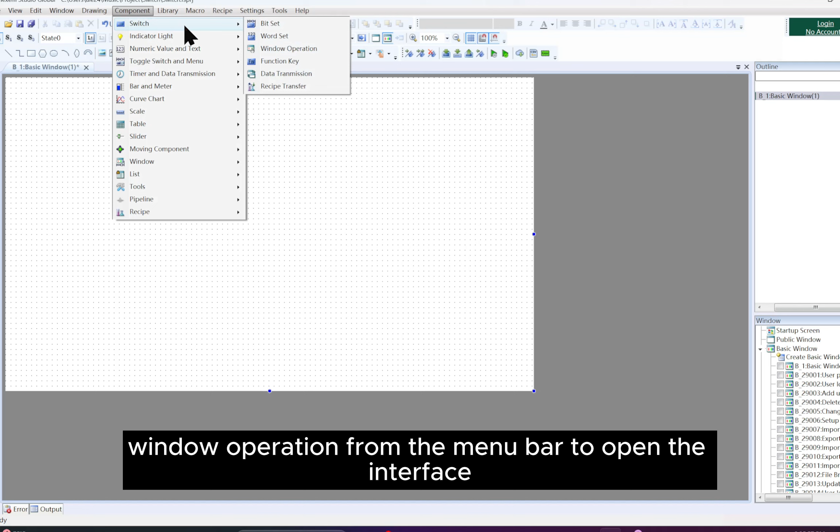Navigate to Component, Switch, Window operation from the menu bar to open the interface. Configure the window operation property. Here's a detailed guide on how to set the parameters.

Action. This includes the press and release actions. After performing an action on the window operation switch, the following functions can be executed.

Switch window. This action closes the current window and opens a different, specified window. It's like changing the channel on a TV - you leave one channel and switch to another.

Close pop-up window. This is an action that closes a window that has popped up the current window. To enable this, you need to include a Close Pop-up Window button or option within the pop-up window itself.

Pop-up. This action opens a specified window over the current window, much like how an advertisement or notification might appear on a website.

Return to previous window. This action closes the current window and reopens the window you were in before. It's like using the back button in a web browser.

Window control bar. This is a tool that allows you to move the position of a pop-up window on the screen. To use it, you need to include a window control bar option within the pop-up window.

Return to the main window. This action closes the current window and brings you back to the main or home window of the application.

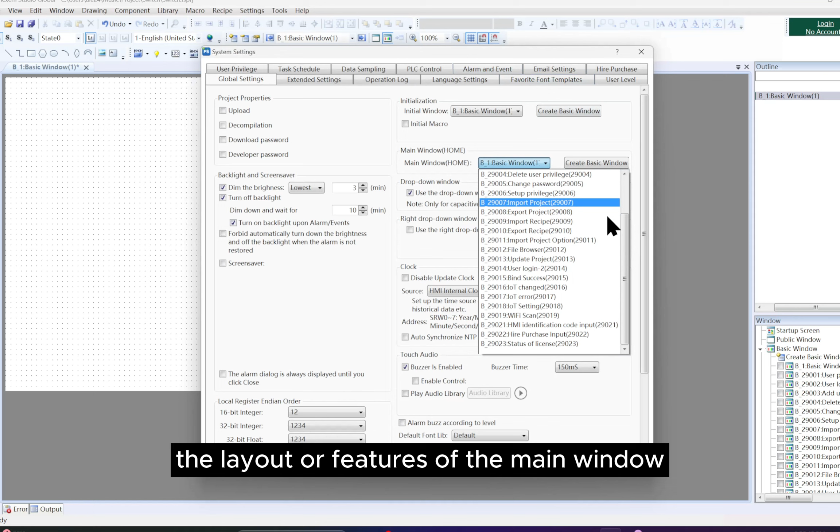Customize the main window. This refers to the ability to change the layout or features of the main window. You can usually find this option by going to Settings, then System Settings, then Global Settings in the application's menu bar.

Now let's put it to the test.

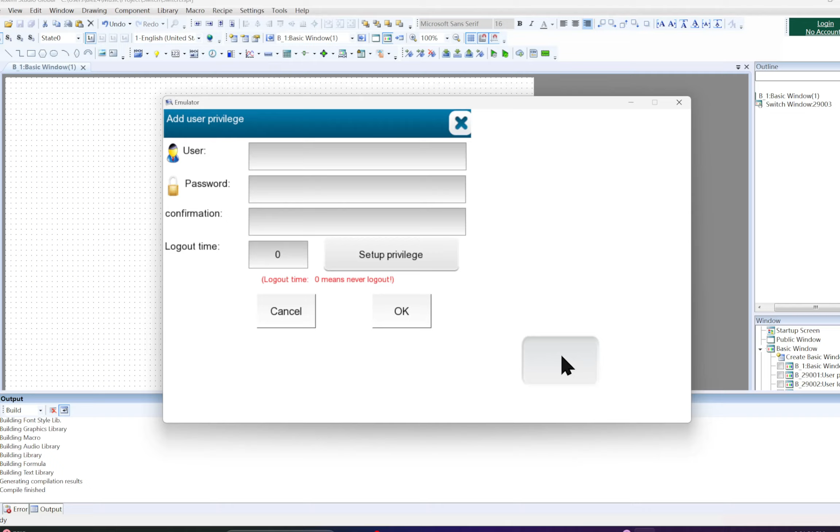Now we will be diving into the world of function keys and their various applications. Function keys are versatile components used to perform specific operations, including keyboard functions, executing macros, system operations, and even printing.

We'll explore the keyboard function. This function allows you to create a function key that can perform a variety of tasks, such as entering a new line, moving the cursor, selecting text, and even mapping to the built-in function keys of the HMI.

Next, we'll discuss the execute macro function. This function lets you perform specific actions on the execute macro component, which then executes a specific macro. You can select an existing macro in the project or create a new one.

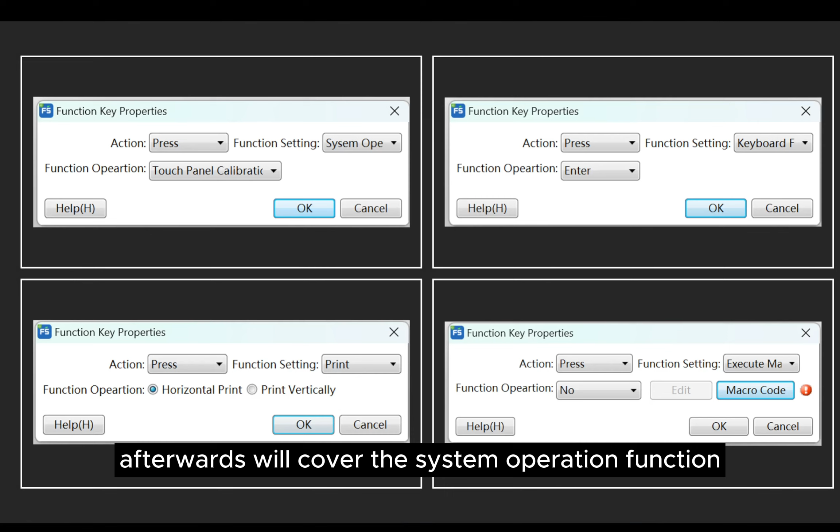Afterwards, we'll cover the system operation function. This function allows you to perform system operations such as touch panel calibration, import, export, and more by performing an action on the system operation component.

Finally, we'll talk about the print function. To implement this function, the HMI needs to be connected to a printer. Performing an action on the printer component will print the window screen information. So if you're ready to dive into the world of function keys, let's get started.

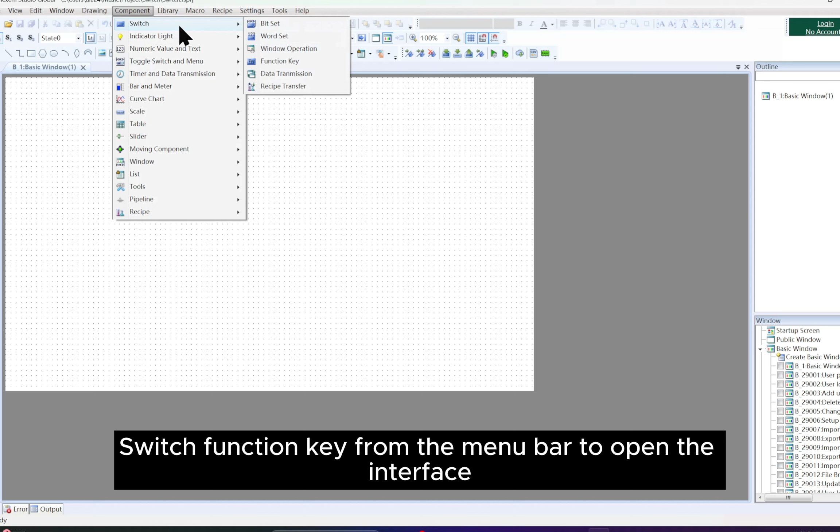Here's how you can create a function key with a keyboard function. Navigate to Component, Switch, Function key from the menu bar to open the interface. Set the function setting to Keyboard Function and edit the relevant parameters. Here's a detailed guide on how to set the parameters.

Action. This includes the press and release actions. Function operation. After performing an action on the function key, the following functions can be executed.

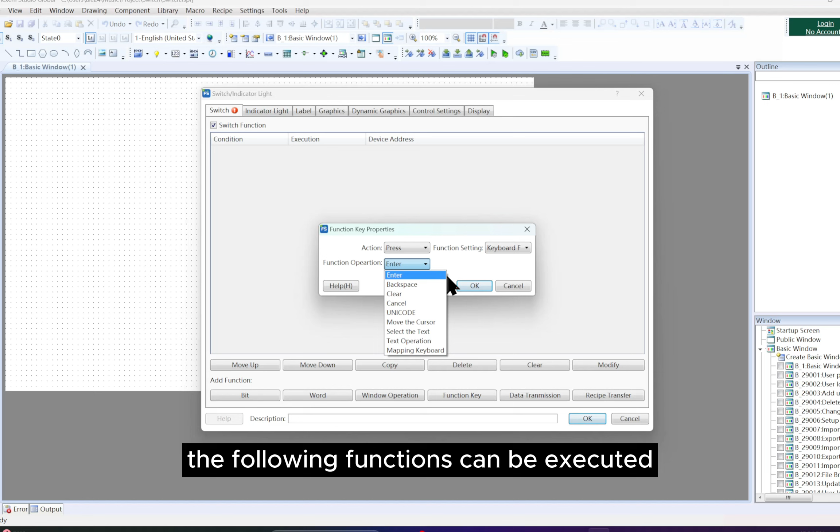Enter. Enter a new line. Backspace. Move the cursor back to the previous character and delete the previous character. Clear. Clear the current input content of the numeric input or text input component. Cancel. Cancel the previous operation.

Unicode. Set the input character of the text input component, which can be a numeric key 0-9, ASCII code, or Unicode character. Move the cursor. Move the cursor in the set direction, including up, down, left, right, to the beginning of the line, to the end of the line, to the first character, or to the last character.

This function is only effective for input components. Select the text. Set the operation for selecting text content, including start selecting and end selecting. This function is only effective for input components.

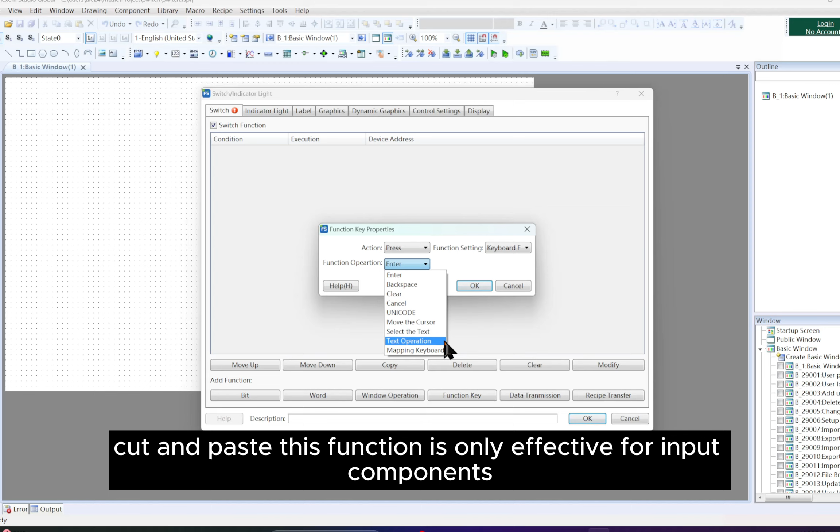Text operation. Operations on text content, including copy, cut, and paste. This function is only effective for input components.

Mapping keyboard. You can map the corresponding function to the built-in function keys F1 through F8 of the HMI, including forward, backward, up, down, cancel, and enter. Set the properties for indicator light, label, etc., and click OK.

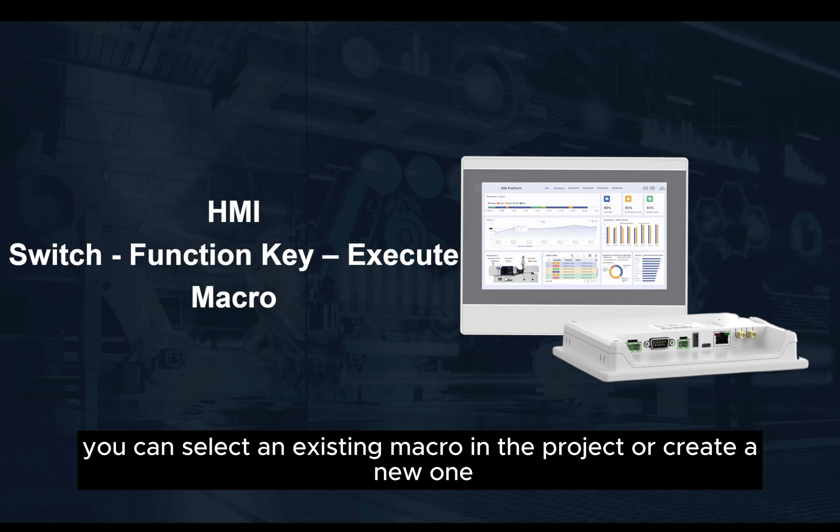The execute macro function allows you to perform specific actions, such as press and release, on the execute macro component, which then executes a specific macro. You can select an existing macro in the project or create a new one. Here's how to create a new execute macro.

In the Function Key Properties dialog box, set the function setting to Execute Macro and click Macro Code. Click Create Macro in the pop-up Common Macro dialog box. In the pop-up Create Macro dialog box, edit the macro name and description and click OK.

Edit the macro code in C language and click Compile. After successful compilation, click Select and Exit. Edit the relevant parameters and click OK.

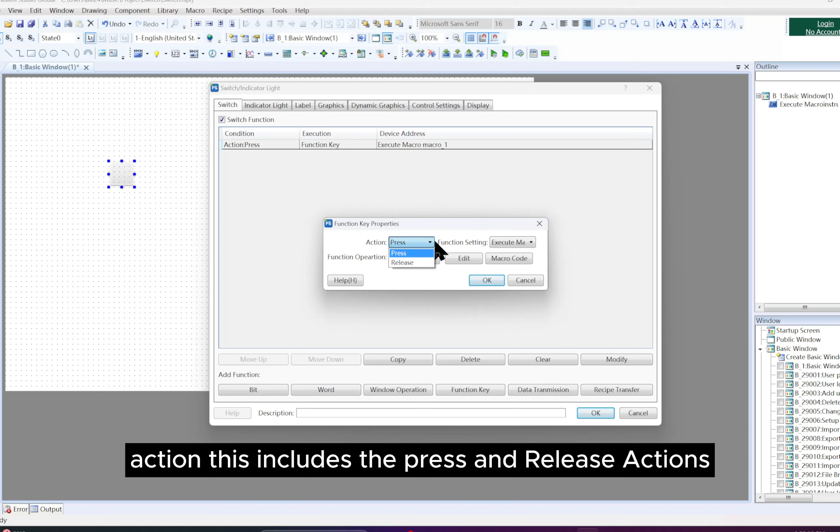The parameters include: Action, which includes the press and release actions. Function operation: select a specified macro. Click Edit to modify the macro, and click Macro Code to create a new macro.

Set the properties for indicator light, label, etc., and click OK. Click any position in the window to insert the Execute Macro component.

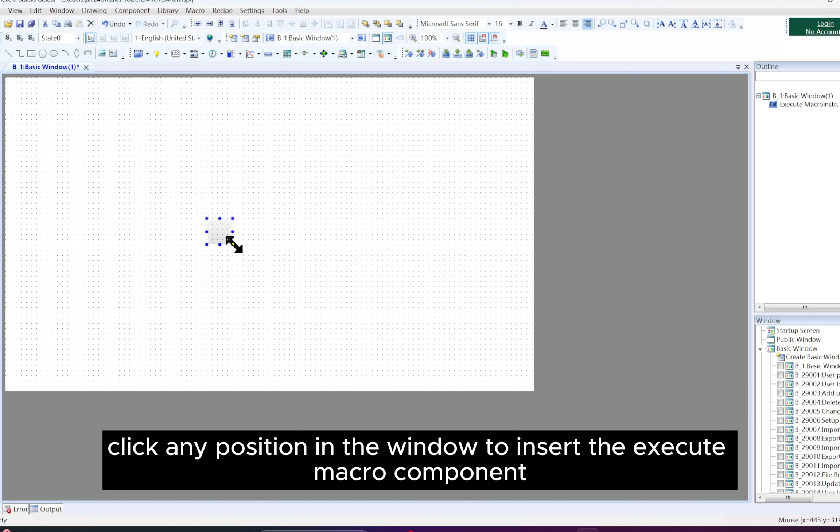Performing actions, such as press and release, on the Execute Macro component will execute the specific macro. You can select an existing macro in the project or create a new one.

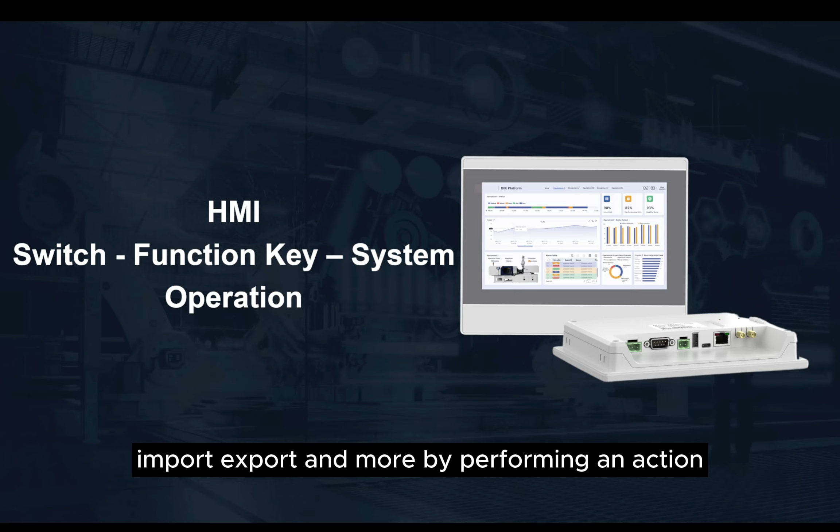The System Operation function allows you to perform system operations, such as touch panel calibration, import, export, and more, by performing an action, press or release, on the System Operation component. Here's how to create a new system operation.

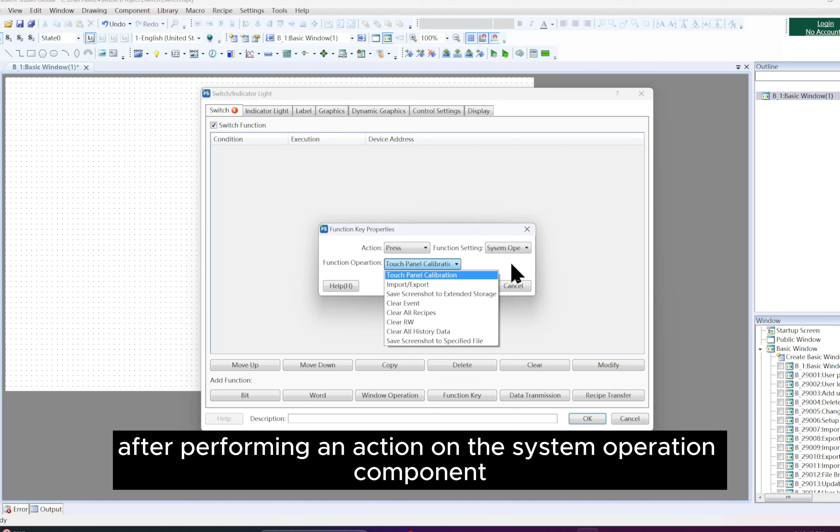In the Function Key Properties dialog box, set the function setting to System Operation, edit the relevant parameters, and click OK. The parameters include: Action, which includes the press and release actions. Function operation: after performing an action on the system operation component, the following functions can be executed.

Touch panel calibration: calibrate the touchscreen of the HMI. Import, export: this includes importing a project to HMI, exporting a project from HMI, importing a recipe to HMI, exporting a recipe from HMI, exporting RW data from HMI, and importing RW data to HMI.

This function needs to be used with a file browser and is only applicable to HMIs with a USB host interface or SD card slot.

Save screenshot to extended storage. Save the HMI screen content in BMP image format to an external storage device for printing or viewing the running state of the HMI screen.

This function is only applicable to HMIs with a USB host interface. Clear event: clear the alarm events by event group. Clear all recipes. Clear RW: clear the contents of all power-off saved RW storage areas.

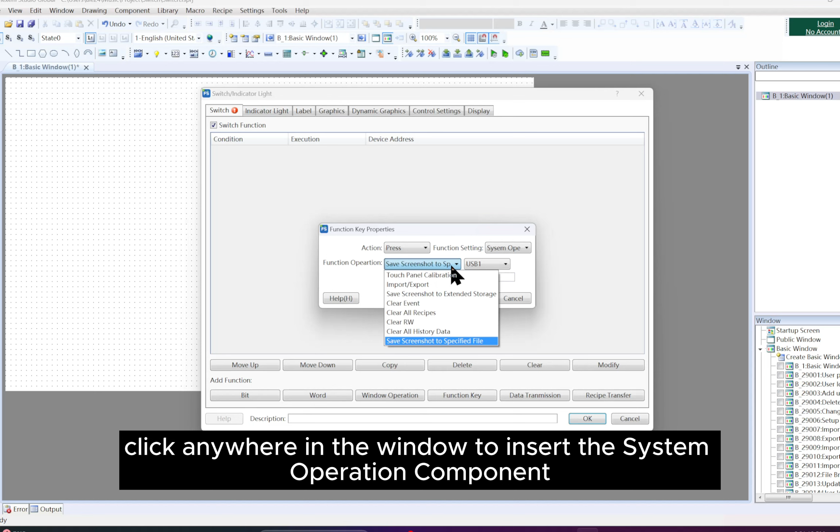Clear all historical data. Set the properties for indicator light, label, etc., and click OK. Step 3: click anywhere in the window to insert the system operation component. Performing an action, press or release, on the system operation component will execute the related operation, including touch panel calibration, import, export, etc.

To implement the printing function, the human-machine interface (HMI) needs to be connected to a printer. The printer information should be set in the following path: Settings, Communication Settings, Printer Interface. Performing an action, such as pressing, on the printer component will print the window screen information.

Here's how to create a new print component. In the Function Key Properties dialog box, set the function setting to Print, configure the relevant parameters, and click OK. The parameters include:

Action: this includes the press and release actions. Function operation: this includes horizontal print and vertical print. Set the properties for indicator light, label, etc., and click OK. Click any position in the window to insert the print component.

Performing an action, such as pressing on the printer component, will print the window screen information.